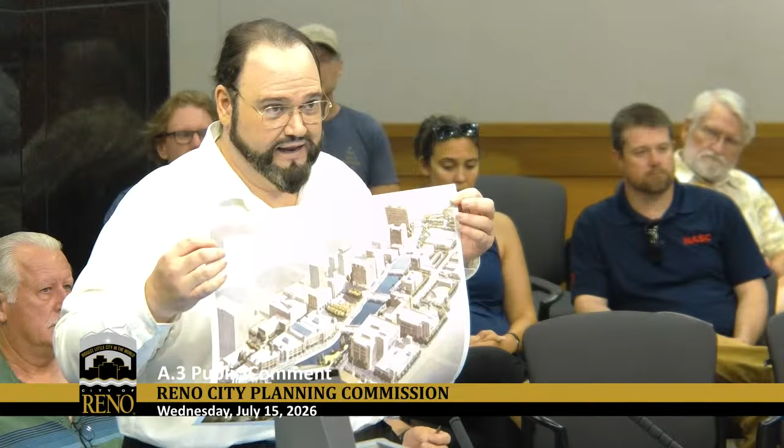Also, I found out additional information, I just want to share this. This is from 1995. This came from a redevelopment agency report about the riverfront revitalization plan that came about after a series of public workshops with the city. Basically, this shows the conceived, finished Riverwalk, which continues all the way to 2nd Street, at the point that wanted to use the Virginia and Truckee Railroad Bridge as a footbridge to open up that east side. So that area that has yet to be developed is very important.

And it's an unfinished project. We have an unfinished Riverwalk that the city is still uncovering archaeological data from, since the redevelopment agency went dormant around 2011 and 2012. So there are other additional code violations happening in that area. The biggest one is the Auto Museum.

Thank you, Damien. Thank you. There's more, I'll talk to anyone else later. Thank you so much.

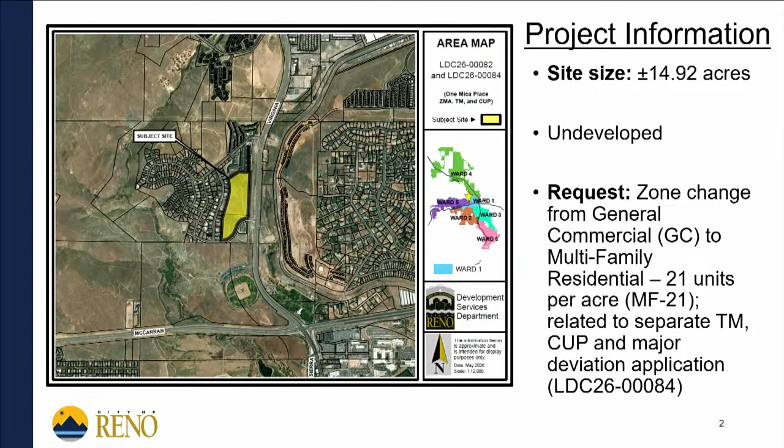This is related to a separate tentative subdivision map, conditional use permit, and major deviation application, LDC 26-84, which you will be hearing next. Zooming in, we can see that the surrounding land uses include multifamily to the north, south, and west, and public right-of-way and undeveloped land to the east.

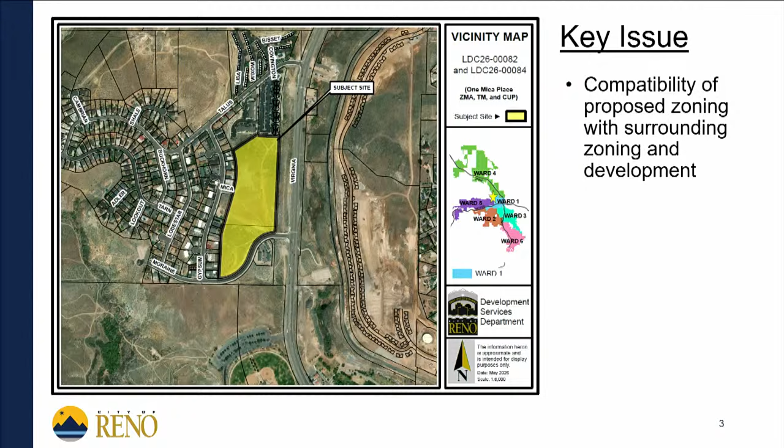The key issue that staff analyzed is compatibility of the proposed zoning with the surrounding zoning and development. The current zoning is again general commercial. This zoning does conform with the underlying master plan designation. However, a corresponding request has been made for development of the property with 74 detached and attached single-family homes. The existing GC zone does not allow for the proposed detached single-family homes, while the proposed MF21 zone allows for both single-family detached and attached product types.

Subsequent residential development will provide for compatible density just outside of the McCarran Boulevard Ring Road and opportunities for transit commutes. The proposed zone change will provide a directly compatible land use and greater flexibility in developing the site, as residential units typically offer greater adaptability to sloped land than does commercial development.

The adjoining MF30 zone neighborhood to the west is predominantly comprised of smaller multifamily properties containing 4 to 8 units per lot. The adjacent MF30 and MF21 zoned parcels to the north and south are developed with larger multifamily uses. Given the surrounding uses and multifamily zoning, the proposed zone change to MF21 is considered to be consistent and compatible with the surrounding zoning and development pattern.

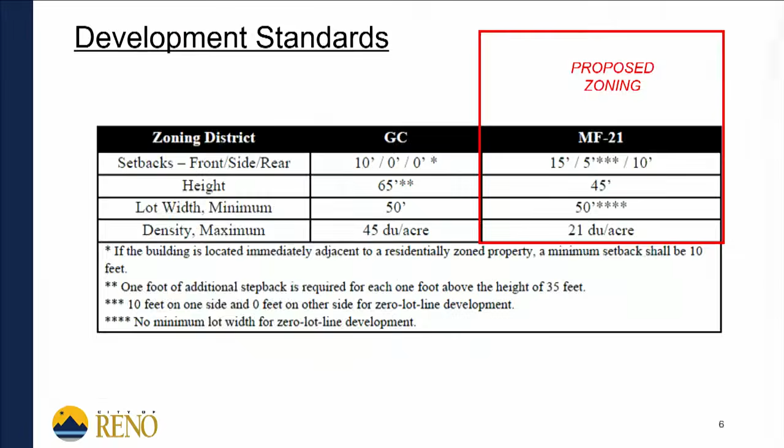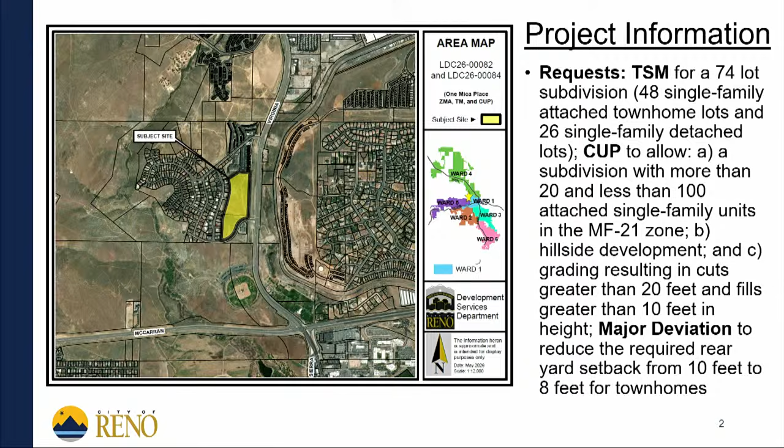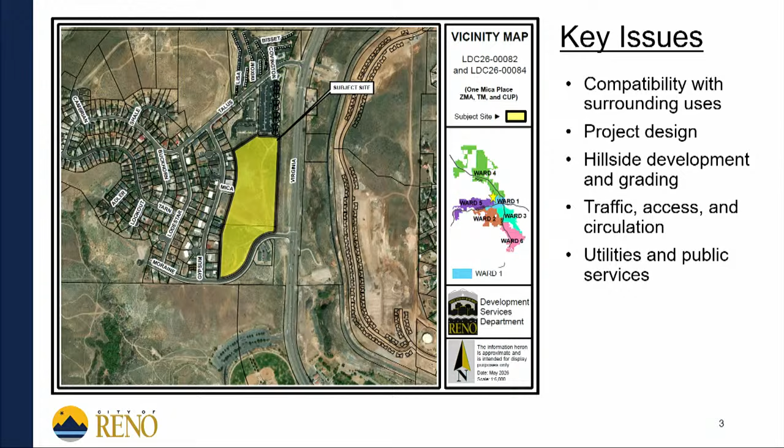Again, zooming in, you have the 4-story apartments and condominiums to the north. You have 2-story apartments to the west, 2-story apartments to the south across Moraine Way, and the undeveloped property to the east across North Virginia. The key issues that staff analyzed are compatibility with surrounding uses, project design, hillside development and grading, traffic access and circulation, and utilities and public services.

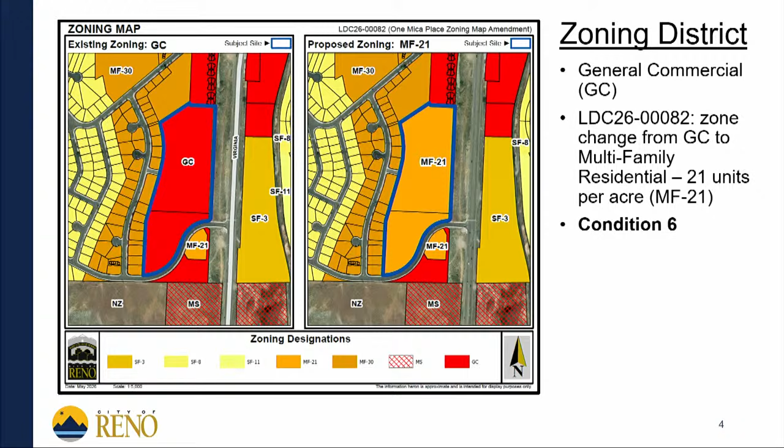Again, the existing zoning is general commercial. You just heard and recommended approval on LDC 26-82 to change the zoning from GC to MF21. Recognize that this application adheres to the MF21 zoning standards and is contingent upon the adoption of the zoning map amendment. Should the council decide not to adopt the zoning map amendment to MF21, the application will no longer be valid as the project does not meet the current GC standards. And staff is including that as condition number 6.

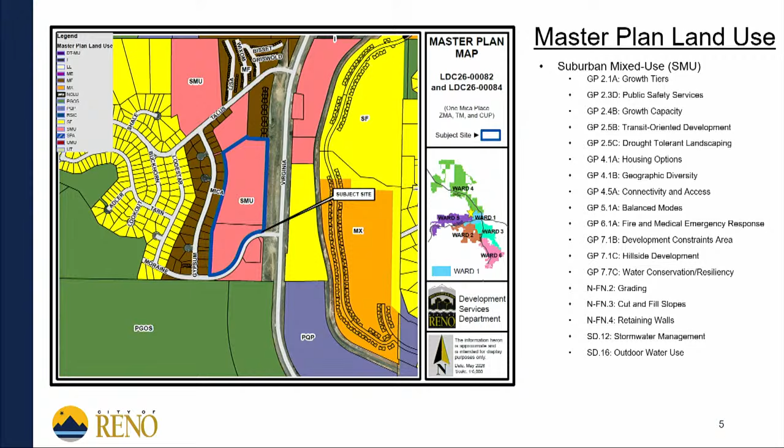The master plan land use is suburban mixed use, and on the screen are 18 goals and policies from the master plan that are in support of the proposed request.

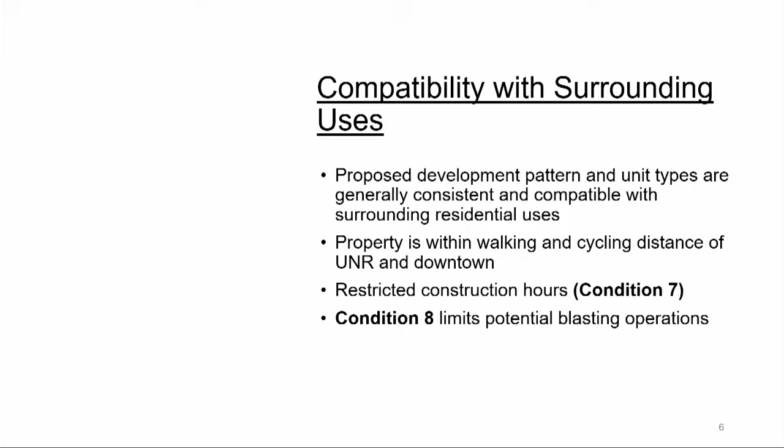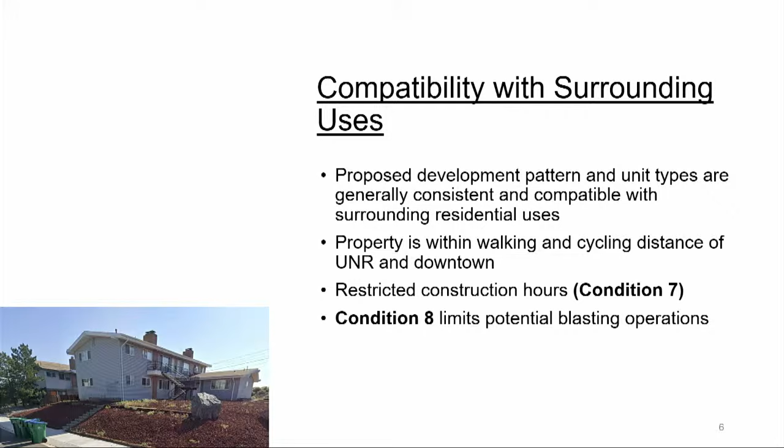Turning to compatibility with surrounding land uses, the adjoining MF30 zone neighborhood to the west is predominantly comprised of smaller multifamily properties containing 4 to 8 units per lot, an example of which is shown in the lower left-hand corner. The adjacent MF30 and MF21 zone parcels to the north and south are developed with larger multifamily uses such as those shown here. The proposed development pattern and unit types are generally consistent and compatible with these surrounding residential uses.

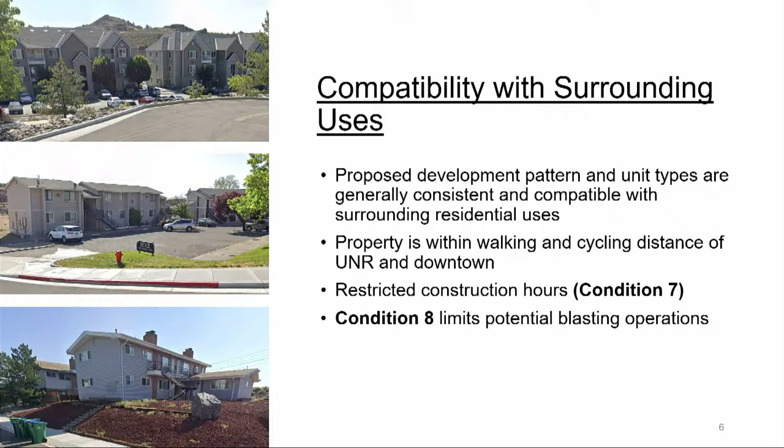Also note that the property is within walking and cycling distance of UNR and downtown. Staff is including recommended condition number 7, restricting construction hours. And in reference to the solid granite that this property is comprised of, staff is also recommending condition number 8 that limits potential blasting operations. Given all of the above, the proposed use is generally compatible with the existing land uses in the area.

These homes propose hillside adaptive architecture to appropriately work with the on-site grades.

Regarding parking, 148 parking spaces are required for these 74 units. The project includes 296 spaces within 2-car garages and 2-car driveways for each home, and an additional 61 common area and on-street parking spaces, for the equivalent of almost 5 spaces per residential lot.

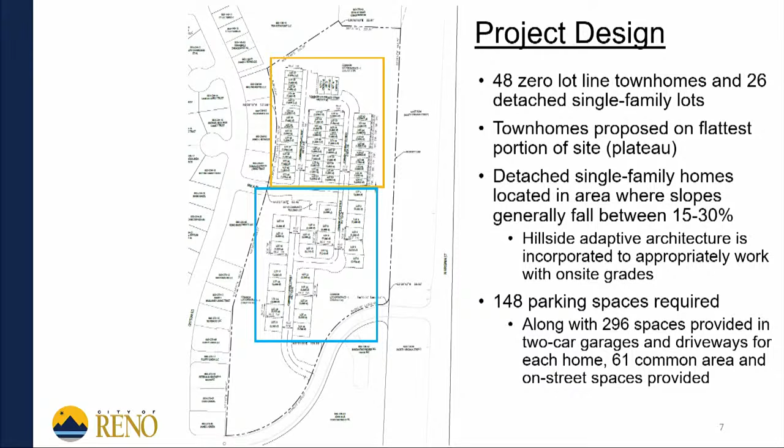This encroachment of the upstairs living area, which effectively increases the available living area without reducing the actual rear yard, is the subject of the major deviation. And lastly, you have the detached single-family homes that range from about 1,860 square feet up to about 2,640 square feet.

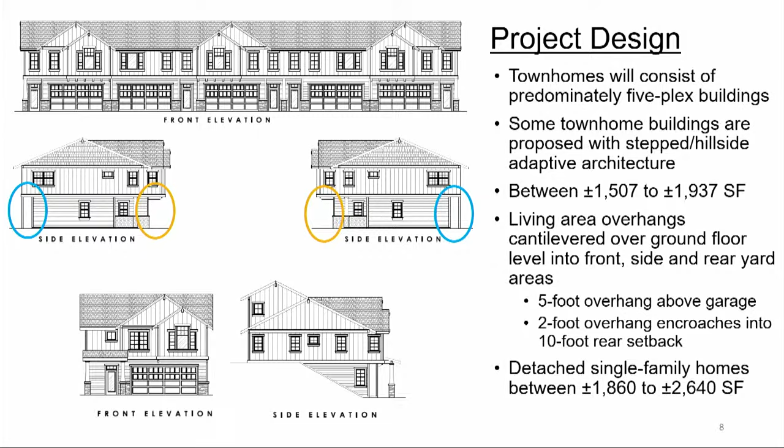Continuing with the project design, the project includes low maintenance and low water usage plantings that will be incorporated into the landscape treatment per condition number 9.

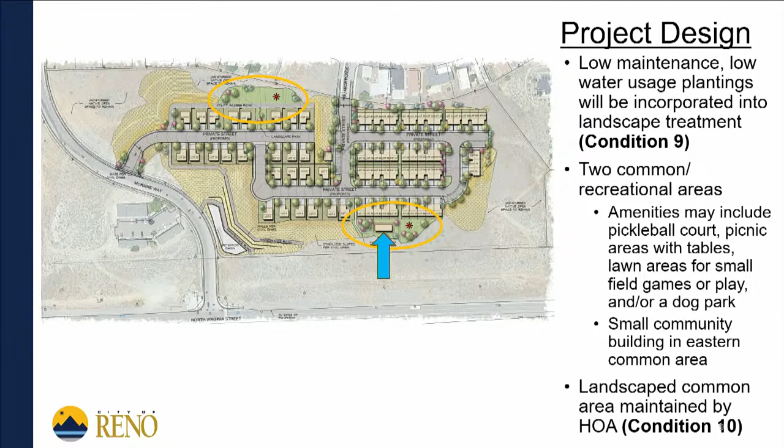There are 2 common and recreational areas shown on the screen here. Final amenities may include a pickleball court, picnic area with tables, lawn areas for small field games or play, and/or a dog park. There is also a small community building in the eastern common area shown here. All of the landscaped common areas will be maintained by the HOA per condition number 10.

Regarding hillside development and grading, the required open space calculation shows that about 8.26 acres of open space must be provided. RMC requires additional open space for development on natural slope areas greater than 30%, of which there are about 0.28 acres on steeper slopes proposed for development.

Therefore, an additional approximately 0.56 acres of open space is required, bringing the total open space area requirement to about 8.82 acres. The proposed site plan shows about 8.7 acres of open space, and therefore staff is including condition number 13 to reconcile that. Also, the max depth of cuts is about 34 feet, and the max depth of fills is about 51 feet.

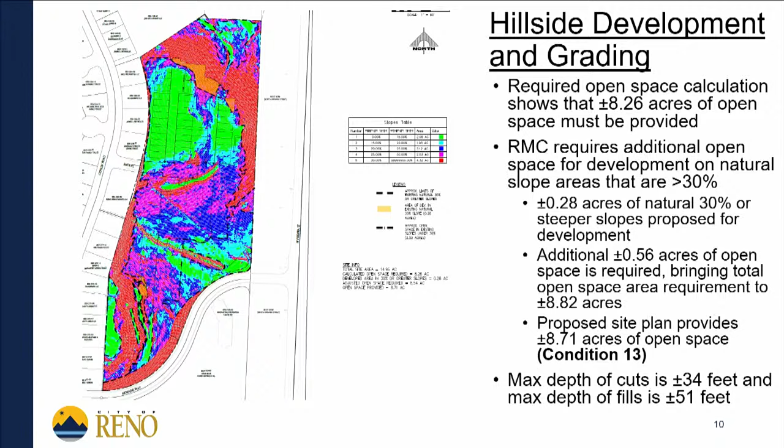Turning to traffic access and circulation, RMC requires a traffic entry and access study if a proposed development is anticipated to generate more than 100 peak hour trips, or a full traffic impact analysis if the project would generate more than 200 peak hour trips.

The project's trip generation analysis identified that 551 average daily trips would be generated, including 41 AM peak hour and 48 PM peak hour trips, and this level of traffic does not trigger any traffic mitigation.

Access will be provided from Moraine Way and Mica Place, and staff has determined that site circulation, emergency access, and pedestrian access are adequate. The nearest transit facilities are located adjacent to the site near the intersection of Moraine Way and North Virginia Street, and staff is recommending condition number 20 to require the RTC Smart Trips program information be distributed to all of the homeowners.

Lastly, regarding utilities and public services, no sewer capacity issues were identified. The nearest fire station is Station 10, about 1 mile from the site, and that should be within the 6-minute response time. Police patrols should not be significantly impacted by this project.

And the project is slated to be served by Elmcrest Elementary, Clayton Middle School, and McQueen High School. The school district has indicated they do not anticipate any issues accommodating students generated by the project.

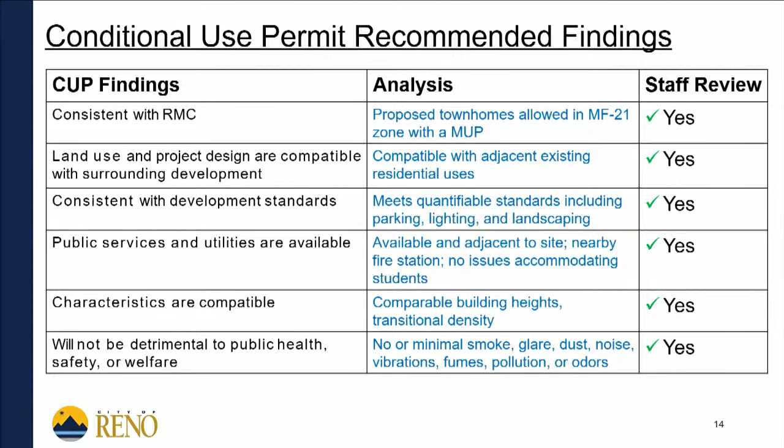I also included the major site plan review recommended findings related to the grading and the hillside development, even though you are not considering a major site plan review tonight because it has been wrapped into the CUP. Nevertheless, it does have some different findings, and again, staff can make these recommended findings.

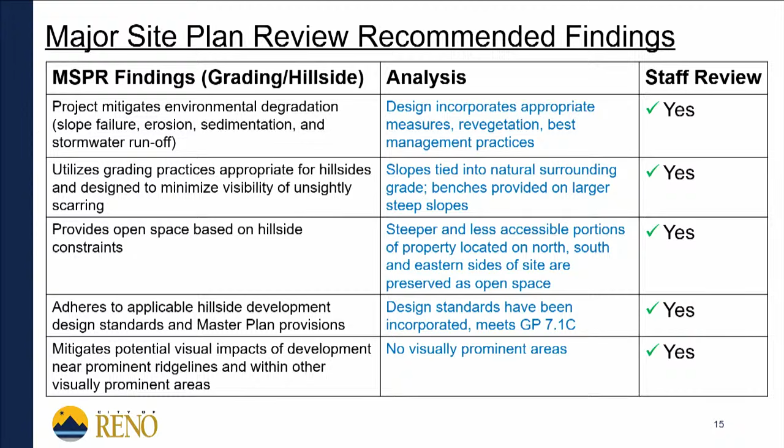And last but not least, the major deviation recommended findings, and again, staff can make these recommended findings. Here's a recommended motion. I'm available for questions, and I believe Mr. Snellgrove is going to be making a presentation.

Snellgrove is going to be making a presentation. Great, thank you, Mr. Foster.

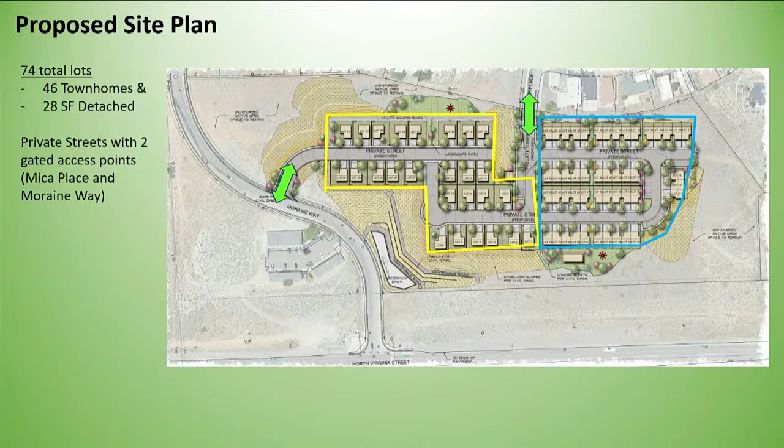We have parking on both sides of the street within the single-family detached area. Within the single-family attached area, we don't have street parking because of the line of driveways, so there's not much room there, but we've established 36 common area parking pockets, and each home will have a 2-car garage and a 2-car driveway.

Jeff pointed out the location of our amenity areas, and I had to chuckle because he did it in about the same manner. Let's see, we went through parking—yeah, I think I covered all that.

This is the slope analysis map. The brighter green areas show 0 to 15% slopes. You can see where we have the townhomes on the northern part of the site, on the right-hand side of the map, which is more conducive to bigger buildings. This is one of the challenges for this site—in general commercial you tend to have bigger buildings, but this site isn't necessarily conducive to that.

This area coming in off of Mica is actually a plateaued area that's been graded. We do have stepped architecture, which I'll cover in another slide, with some buildings going uphill, some downhill, and some flat to minimize overall grading on the site.

When you get to the south end towards Moraine Way, it tends to be in the 15 to 30% slopes. By regional planning and City of Reno standards, that's considered developable, but it takes more care working in those areas. The nice thing about single-family detached is they have smaller footprints, so we can step them down the hill more easily than with a townhome product.

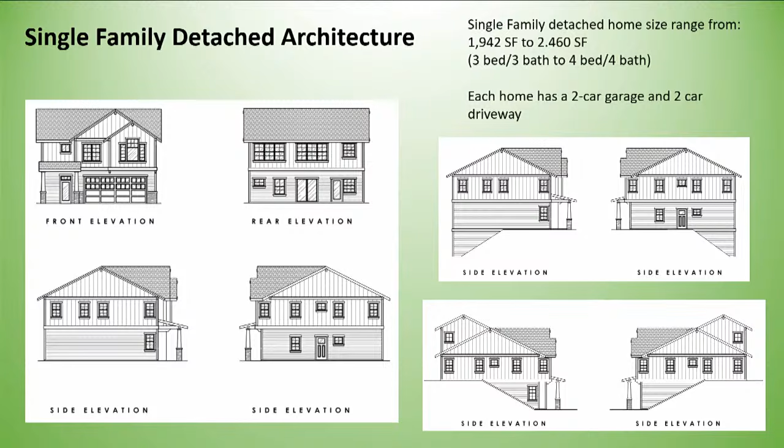On the single family, we've got the same considerations. We have some homes that will be flat, the standard 2-story, and then we've also got uphill and downhill stepped single family. None of these have the pop outs or protrusions in the rear yard, and none of the single family detached have the major deviation component to them.

This went through a few approvals over time. The one I was able to get the most information on was the most recent one, from 2015. I took a look at what some of the concerns were. This was appealed, it was called Southern Edge, and it went on to City Council. I took a look at the appeal information and we tried to appropriately address these things within our development. Were we able to address everything? No, probably not, but I think we've done a very good job.

Water pressure - we did reach out to TMWA to ask about any water pressure issues in the neighborhood, and I believe that possibly Mr. Tabor, who spoke during the last item under the zone change, might have been either a family member or the person that filed the appeal. So hopefully the water pressure has gotten better up there over time, but I know that was a concern. We'll talk to TMWA.

We will have to meet requirements for TMWA meeting the pressure for this subdivision, not only for domestic use but also for fire flow pressures in the neighborhood. When we talked to Tim Simpson, Mr. Sutherland, the engineer on the project, talked to him and he said he was unaware of any pressure issues in the area. So we will be looking into that because we definitely want to be able to meet it with our subdivision.

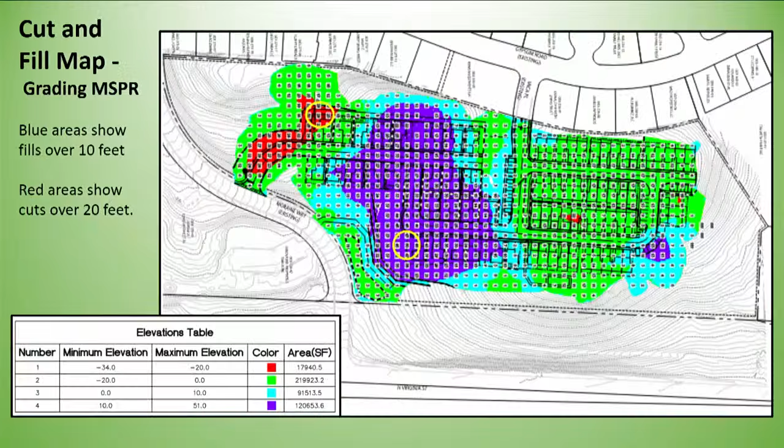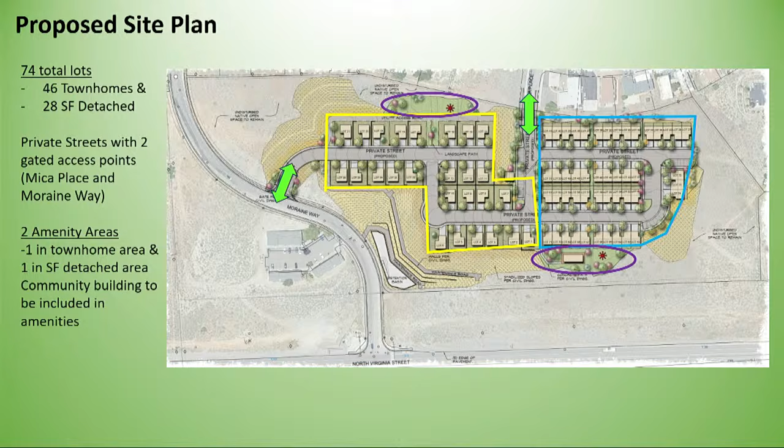Impacts on adjacent properties on West Gypsum - we're separated from the single-family homes by probably plus or minus 100 or more feet, and where we get closest to some of the homes on Gypsum is really on the townhome portion, where we've got a 10-foot rear yard and another probably 10 to 15 feet toward the northern side of the map. It gets a little closer there, but we feel we've got good separation. We're not grading right up adjacent to those existing lots or uses, so we feel we've appropriately addressed that.

Safe for pedestrians and bicycles - through the research on this, we've come to learn NDOT has a project that'll go on after the 395 freeway improvements are done, which are currently blocking off the access on and off the freeway from 395.

And when those get done, they're estimating it's probably 2028, which likely won't be too far off from when this gets built. And if you know the time frames necessary to go through final engineering and get the approvals in place, we'll probably be in a similar time frame. But I understand there's a multimodal transit lane NDOT's working on that'll go all the way up to the Panther Valley connection between McCarran and Panther Valley. This is an area that needs pedestrian access, and that is in the plans and NDOT has that worked out.

Street parking on Gypsum, we talked about that earlier, will be gated. We've got ample parking. We don't foresee that people really need to park outside of the subdivision, thus increasing impact on that.

Inclement weather and icy roads, I understand that one. I've seen it on different slopes. I think Moraine was about 8%, and Talbot might have been in the 6 or 7% slope range. Our roads within the subdivision are generally south-facing. You get a couple shady parts on Moraine and Talbot that can hold ice a little longer, but that really becomes more of a city road maintenance issue. Our streets within the subdivision won't be the responsibility of the city of Reno — they'll be private streets because they're gated.

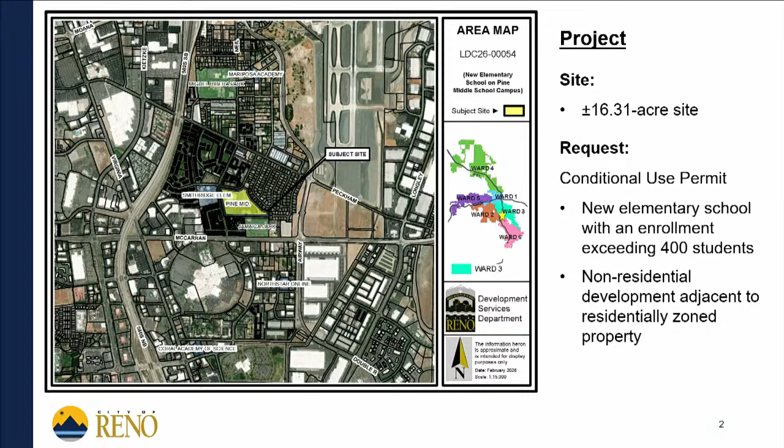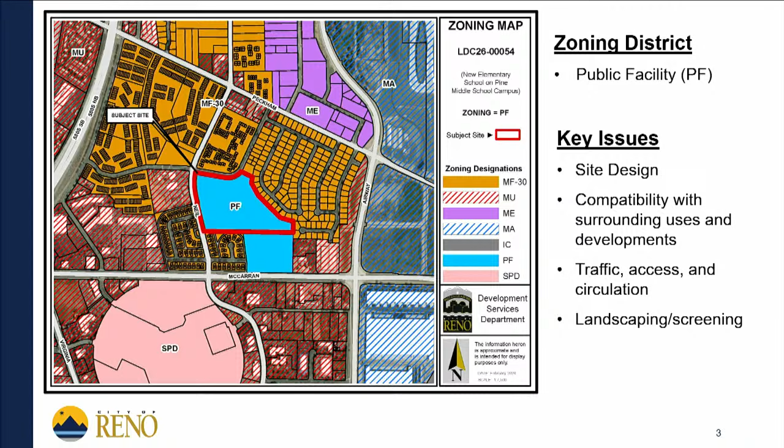Here in yellow you can see the existing Pine Middle School campus. It's on the southeastern corner of the intersection of Neal and Filbert. It's a 16-acre site, and the request before you today is for a new elementary school with an enrollment exceeding 400 students and non-residential development adjacent to a residentially zoned property. The subject site is currently in the Public Facilities Zoning District, which is completely appropriate for a school. Key issues we looked at were site design, compatibility with surrounding uses and developments, mostly traffic access and circulation, and landscaping and screening.

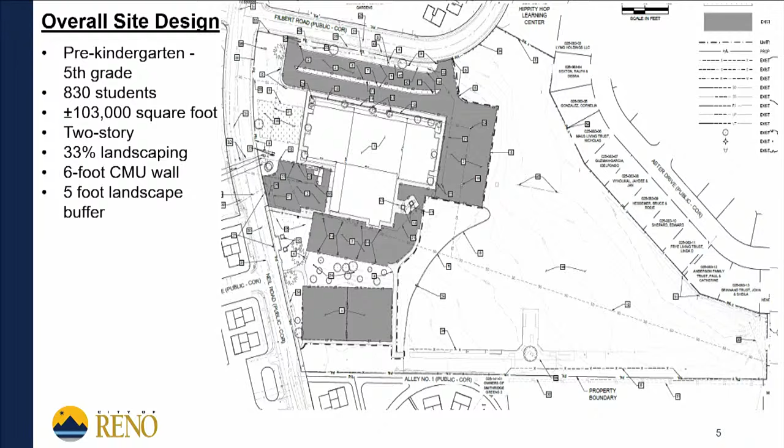The only part of this project that's really going to be more impactful to those adjacent residential uses is this area right here, which is going to be a secondary pickup and drop off for parents. Because it's the secondary drop off, just this loop over here, we did ask that the applicant provide a 6-foot CMU wall and 5 feet of landscaping along there to mitigate any impact, because as you can see on that demolition plan, nothing has existed in that location for the last 50 years.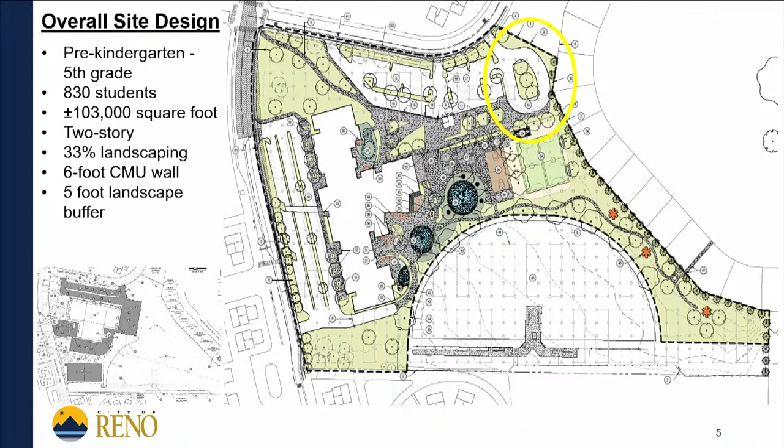So again, we're looking at pre-kindergarten through 5th grade, approximately 830 students, which is around the same number that go to the two schools right now. This would be just over 100,000 square feet, a 2-story building. Most of that landscaping in the fields that are out there are going to be maintained, so it is a large percent of landscaping.

Traffic access and circulation was probably our top issue on this that we analyzed over and over. I will point out that long before the project came into planning's hands, the applicant, Washoe County School District, was working with our public works and engineering departments to figure out how best to mitigate traffic in this location. What they came up with was that parent pickup and drop off is what's kind of in that purple-pink color, so it's going to be moved from the Filbert side over to the Neil Road side.

But there will still be that secondary pickup and drop off over on the north side, and the school bus will drop off and pick up over there on that north side off of Filbert, delineating those two areas to reduce traffic impact. They are going to put a mid-block crosswalk on Neil to prevent left-hand traffic, a raised center median to prevent that left-hand traffic, and 2 raised mid-block crosswalks with flashing beacons as well.

If you have more questions about traffic, I think we can bring somebody else up here to talk about it.

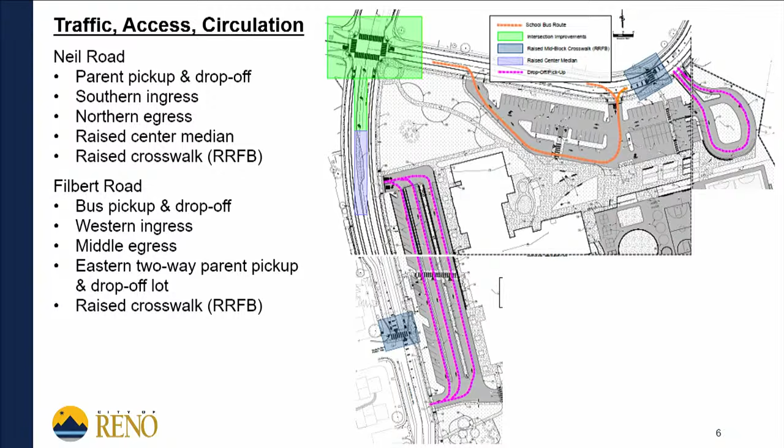This project did go through the Ward 3 Neighborhood Advisory Board. Overall, the NAB members appreciated the investment in the new elementary school. They wanted to make sure adequate shade was provided on campus. They had safety concerns related to the nearby intersection and wanted to know if this would possibly require a traffic signal at that location, which it didn't. They were very interested in the potential traffic control improvements, which I just showed you on the screen there.

We did only receive 1 public comment, and they were concerned about relocating the primary pickup and drop off from the Filbert side to the Neil Road side. The applicant did reach out to them and explained the basis for that change, and I didn't hear anything else from them.

Conditional use permit findings, this is a pretty easy one. It's located in the Public Facilities Zoning District. It's an existing use in an existing neighborhood. Schools are generally compatible with neighborhoods as they serve those neighborhood families. This will have similar activity patterns to the schools that are already there, and a new school is always considered a community amenity.

With that, that concludes my presentation. The recommended motion is on the board, and the applicant is here with a presentation as well. Thank you, Ms. Picotti.

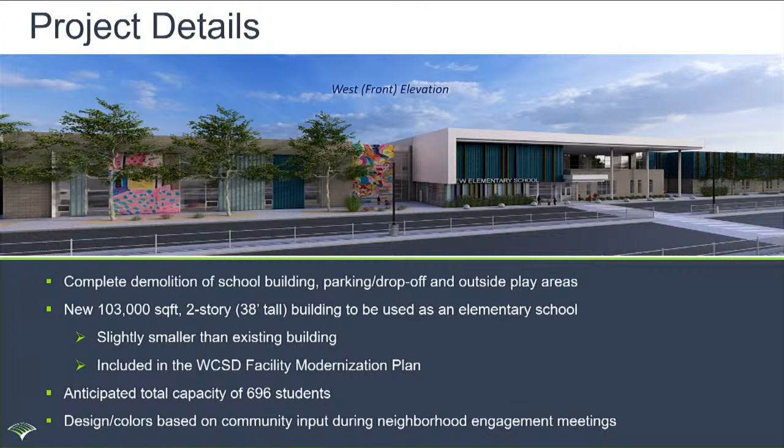Talking a little about the site details - Leah talked about the existing school building. It is being demolished, and the orientation of that building is going to turn. Right now the main entrance is off of Filbert, and with this demolition and rebuild, the main entrance will be off of Neil Road, where the primary parent drop-off area is shown in light blue along Neil. That orientation shifted in order to separate bus loading and unloading areas from parent drop-off to provide safety for students coming and going. Orienting it towards Neil and separating it from bus loading provides student protection and keeps vehicles from engaging in an unsafe manner.

The project does include new playground area, as Leah mentioned, and a lot of that's driven by community input during those meetings. There is no change proposed to the softball fields in the southeast corner of the project - the school district wants to maintain those and keep them open as they are today.

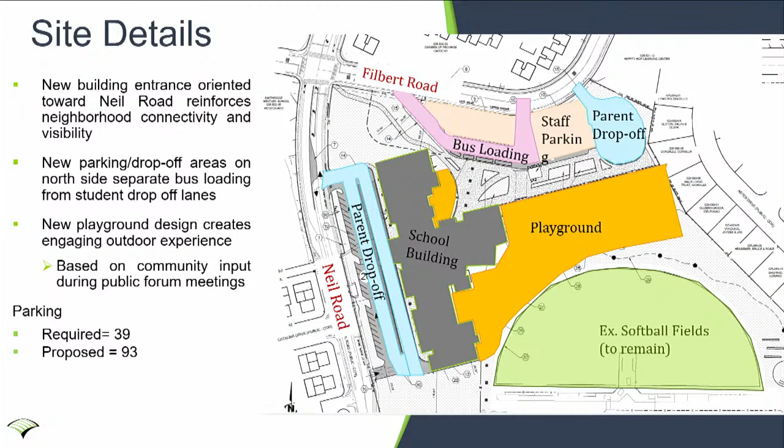You mentioned parking on some of the other projects. Parking required for this school is 39 spaces, and we are proposing 93 spaces that would accommodate parents and all the employees at the school district. So we've well exceeded that requirement.

Landscaping and screening - again, Leah did a great job talking about this, just a couple things to mention. The proposed project well exceeds the requirement. We have almost 34% of the site in landscaping, 200 trees minimum, and we've done our best to preserve and maintain some of the trees. Right now we're looking at 13 of the trees - I apologize, I don't know how many trees exist there today.

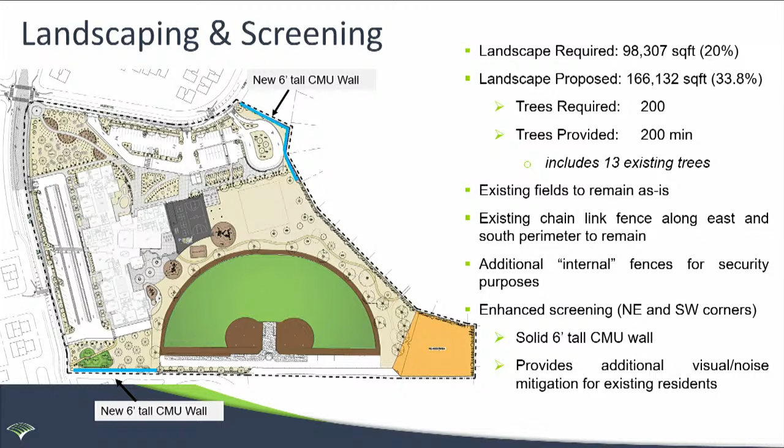I mentioned the existing fields - the chain link fences along the east and south boundary will remain, as well as some smaller internal fences for student safety purposes. We also mentioned the enhanced screening in the northeast corner, shown by the blue line there, and there's also a new 6-foot-tall CMU wall down in the southwest corner. Those are placed intentionally adjacent to existing residential areas - we're trying to mitigate and screen for noise or potential headlights that might impact those areas by providing those 6-foot-tall CMU walls.

Traffic and circulation - Leah touched on this as well. We did a traffic impact study, considering the existing school capacity as well as the proposed new school capacity. The study area included 9 intersections and 3 vehicular access points, color-coded to make it easy: Neil Road in green, where we looked at those 2 entrances into the primary parent pickup area; orange is the school bus route for drop-off and pickup; and dark blue or purple is the new parent pickup area. The project is anticipated to generate approximately 1,500 ADT, pretty similar to what's there today.

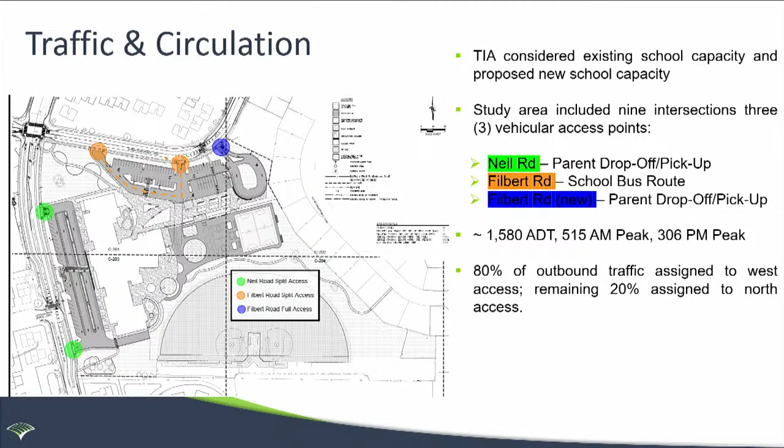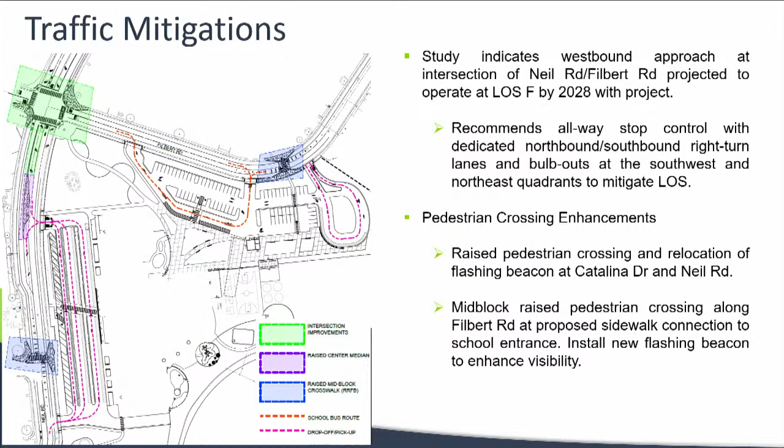We're not expecting a big difference in traffic with the new project. Leah touched on the mitigations that came out of the traffic study, but I'll touch on them again. The big improvement was an all-way stop control at the Filbert and Neil intersection, which you can see on the exhibit, along with some pedestrian crossing improvements on Neil Road and again at Filbert. If you have specific questions about the traffic study or the mitigations, Garth Oxel is here from JUB, who prepared the study, and he can answer your questions.

I kind of breezed through that in a hurry, but I think Leah did a great job. I'm happy to answer any questions, and the school district is here if you have more specific questions about the project. Thank you.

That moves us into disclosures. Mr. McCoy? Commissioner McCoy, no disclosures. Commissioner Williams: read and reviewed the material and familiar with the site. Commissioner Confiantini: read and reviewed materials, brief text exchange with representation at Wood Rogers. Commissioner Valto, no disclosure. All right, that moves us on to public comment.

Thank you, Chair. I have one public comment in person from Nicholas Moss. Come on up.

Hello, Council. I'm Nicholas Moss, 4641 Astor Drive. If you pull up the site plan, I'm right by the basketball court, I think. A couple concerns: right now Pine Middle School has very bright lights, so we've put blackout curtains on our bedroom. Nighttime lighting is a concern for the neighbors, especially those right along that fence. I'm wondering if we could specify some sort of downward-pointing, possibly LED lights that don't shine directly into the backyard.

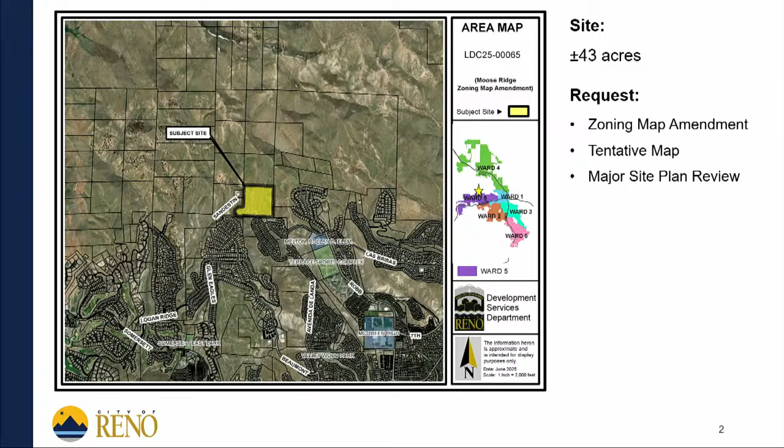So request number one is for that zoning map amendment. What you see on the board is what was presented a year ago, from SF3 to SF8. Planning Commission at that time said they'd like to understand more about what can be developed on this property and what the real actual densities are related to hillside development and everything else.

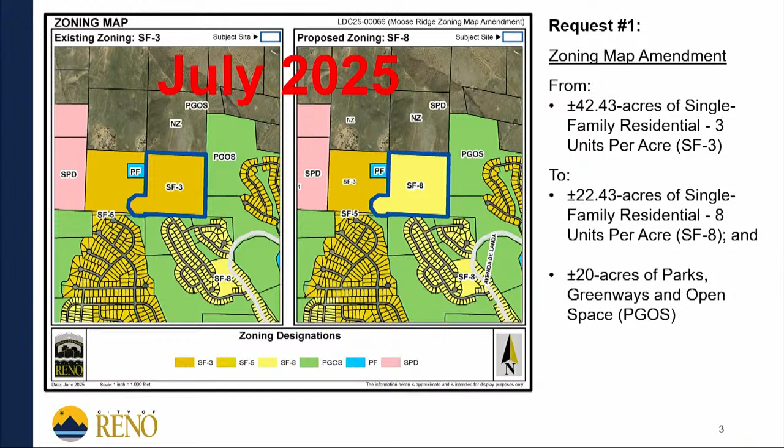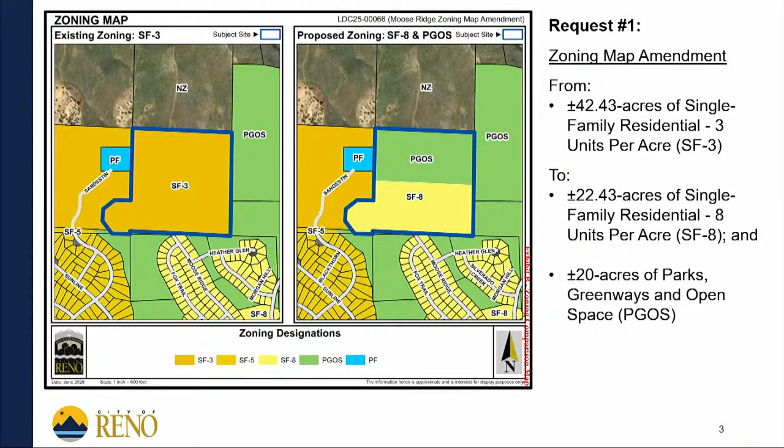So now the applicant has come forward with that tentative map and the major site plan review, with 20 acres of parks, greenways, and open space on the northern portion of that parcel. So now they're looking at 42.43 acres of single-family residential at 3 units per acre, changed to 22.43 acres of single-family residential at 8 units per acre, and 20 acres of parks, greenways, and open space.

So request number 2 is for the tentative map. This is for a 46-unit single-family detached subdivision. That is not what's in the staff report — the staff report shows 47 units, but there was a last-minute change to the design, reducing it to 46 units. So what's before you is actually 46 units, not 47.

So we have that tentative map request, and then a major site plan review for everything applicable. We have grading resulting in cuts greater than 20 feet in depth and fills greater than 10 feet in height. Grading within the parks, greenways, and open space — there's just a small sliver of that down at the very bottom. It's a separate parcel, not included in the zoning map change, but it is included in the tentative map because it's going to be graded for the roadway. And then we have hillside development and disturbance of a major drainage way.

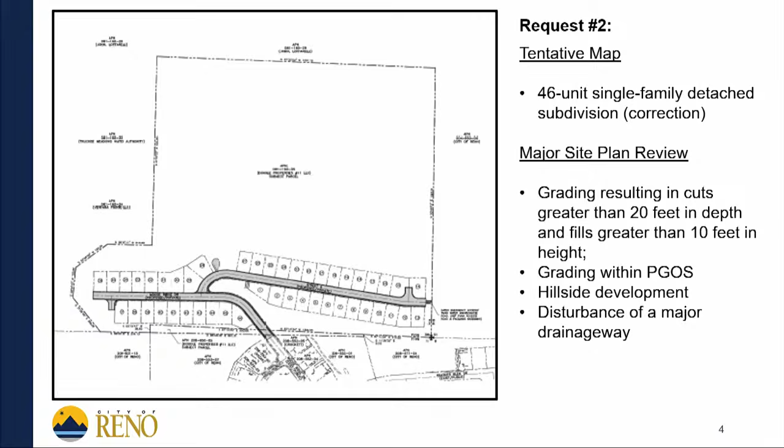So I have the slope map up here because when we went to Planning Commission last time, they had a lot of questions about development. How can this property be developed? How can we look at a zoning map amendment without understanding what can really be here? At the time, the applicant and staff concurred that because of the slopes on this property, any kind of development was going to be pretty restricted.

They didn't like the idea of rezoning the whole 42 acres without understanding what was really possible, and then drainage on that site. So staff took a look at it this time, and we looked at the overall site design and the lot layout, the compatibility with surrounding residential development, and basically what the surrounding densities look like in comparison to what this would look like.

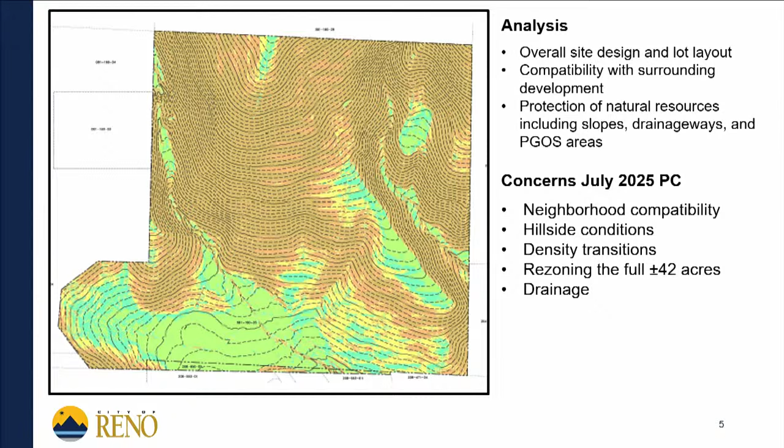Protection of those natural resources, including the slopes, the drainage ways, and that PGOS area. So what we've come up with here is about 9 acres of developable area. And if we go back to that slope map there, you can see pretty much this is the area down

on green, which is the least steep part of this property. So here you can see that tentative map there. We have approximately 33 acres of open space, which is fabulous. This will accommodate 46 single-family detached homes with average lot sizes of about 6,000 to about 7,300, which is very consistent with SF8 development and those surrounding subdivisions.

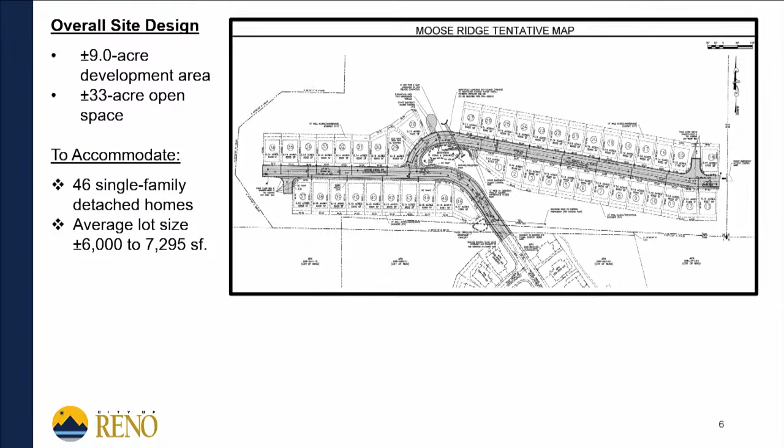Previous applicants and previous planners worked really hard to make sure that this was going to be a project that was going to protect the neighborhood, improve drainage, maintain those existing trails. There's some 4x4 trails up there. They wanted to make sure that those would be preserved and that people could still access this private property.

And basically, those conditions of approval have been vetted. They have been approved by planning commissions. They have been reviewed by applicants. They have been presented to the neighbors. So when I looked at the conditions of approval for this property, for this project, I said, well, all of this resolves or mitigates those concerns.

So basically, condition 6 through condition 19 are the same conditions that were placed on the previous approvals. Just to highlight a few of those things, we have concerns related to density and compatibility, but we have rockery walls and riprap and natural landscaping. Things are going to be backfilled with soil. We're going to have revegetation.

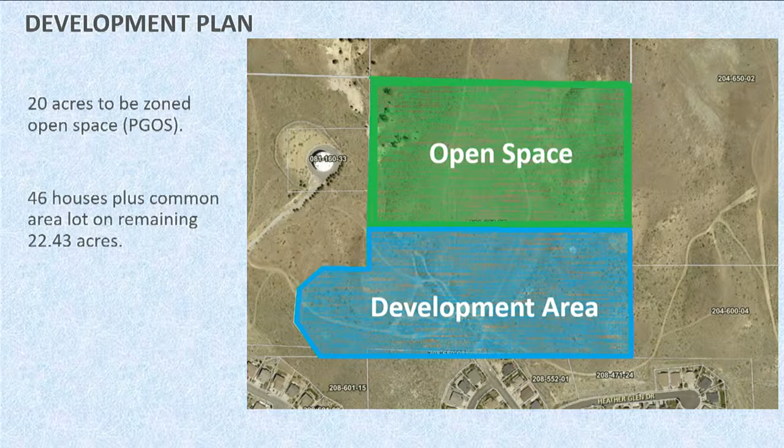So this is the schematic of our development plan. 20 acres to be zoned open space, and then the blue part is the development area. That's where our subdivision will go.

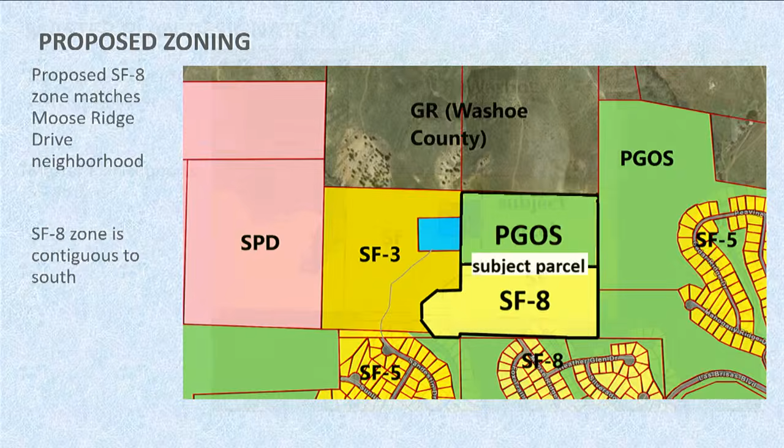The important elements here are we're going to have streets with public parking, so access to existing trails will be maintained. People can drive up and park and use that open space above us, same way they are now. We have ample parking on the street, and then each unit has driveway and garage parking.

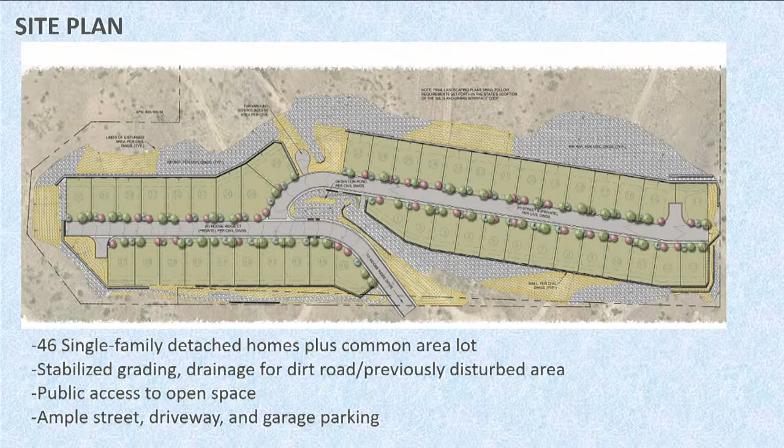Additionally, there has been concern from the neighborhood about flooding or what I would call informal grading, uncontrolled erosion in the area. That's just I think from off-road use, from trail use. I'm not sure how that developed, but it obviously wasn't planned, it wasn't regulated, it was just people going at it. So we're going to stabilize that. We have no choice but to, if there's an existing problem, we'll fix that. So we're going to stabilize that area and reinforce it, provide engineered drainage, formalize the engineering that needs to be done.

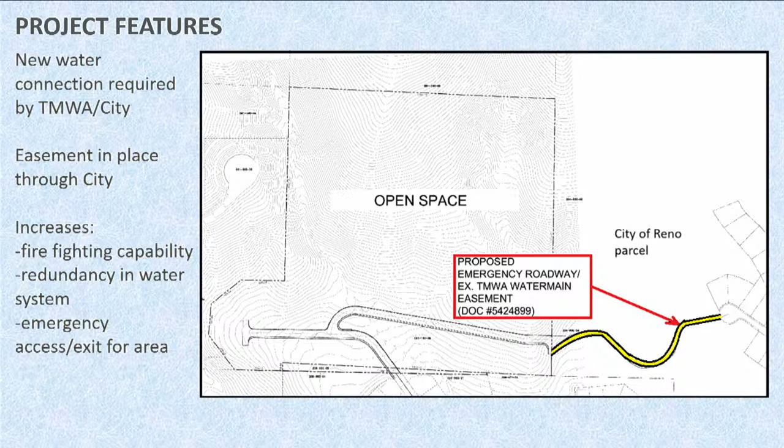Additionally, we're also working with the city of Reno and TMWA on this project. We have agreements in place with the city of Reno and with TMWA to provide road access to the neighborhood to the east of us, and allow them to install a water line in there. So we're adding redundancy to the water system. That's a public benefit. It allows improved firefighting, it allows more stability of the water supply. So we're to some degree partnering with public entities on this project for the benefit of the greater area.

So the major site plan review, I would just like to point out that's a fairly common element of any project in hilly areas of Reno. The cuts and fills, hillside development, disturbance of a major drainage way, those are certainly standard items for anything out in this side of town. So that's not really unique to this project. That's part of the planning process, and we're complying with those requirements.

As I stated earlier, the goal is to allow our design to minimize grading on the steeper parts of the slopes or the more visible parts. So our project is both on the more accessible slopes and on the less visible ones. So we won't be extending our development far up on the hillside or up on ridge lines.

So an overall summary: we promote the goals of the master plan. We're adding housing, we're adjacent to existing residential. Our zoning that we're requesting is compatible with the area. The tentative map does not maximize the unit count, we're well below the maximum potential there. Major infrastructure for the project is in place.

Roads in the area are generously sized, they can easily handle this traffic. There's been questions from the neighborhood about traffic, but the traffic numbers just don't show that. We don't trigger any traffic problems, and the project is too small to trigger a major traffic study. I noted last time we were here that the roads serving that neighborhood are roughly the same pavement width as West Plumb Lane, which handles, I'm going to guess off the top of my head, 10 times the traffic. So roads, in my opinion, are fairly generous.

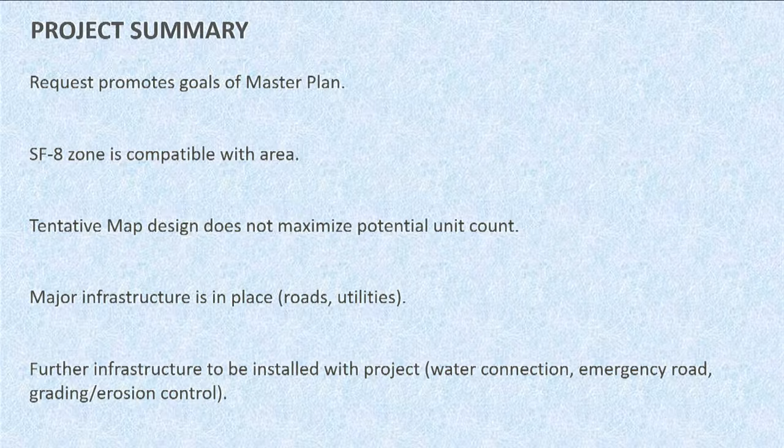Revisions and public outreach. We're here because we feel we've complied with Planning Commission's earlier request. We've provided a tentative map plan, and we've revised our zoning. So we hope that we have done our homework, done what was requested of us. We feel the project now meets the goals that were voiced to us last time we were here.

Earlier in the project, we did essentially a NAB meeting with Devon Reese. I walked the neighborhood and handed out printed descriptions of the project to both our immediate neighborhood and adjoining neighborhoods. I responded to calls and emails and did my best this week, but somehow nobody left contact information with the city, so I didn't talk to anybody recently. But I'm always happy to talk to neighbors and try to keep people informed.

The only final point, as with the earlier tentative map tonight, we do need all 4 votes. So if somebody had a major problem with this, we would much prefer to take a continuance and come back and have a larger hearing with the full group at a later date if it came to that. But again, we feel this project's been well reviewed and amended, and we feel it's approvable as it is.

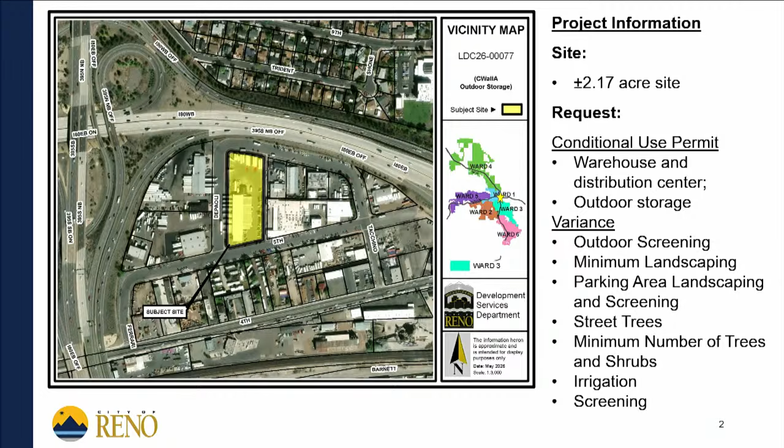So we're looking at a 2.17 acre site located just in the Spaghetti Bowl, the east side of the Spaghetti Bowl. You can see there you've got I-80 to the north and 395 to the west. So the request before you is a conditional use permit for warehouse and distribution center and outdoor storage. And then we've got a variance request for waivers for outdoor screening, landscaping, parking area landscaping, street trees, minimum number of trees and shrubs, irrigation, and screening.

So the site is located in the mixed-use urban zoning district. You have the freeway to the north, industrial uses to both the east and the west, and to the south, a small mobile home park that has existed in that area for over 50 years. Key issues that we looked at are general code compliance and compatibility with surrounding developments, specifically that compatibility with that mobile home park.

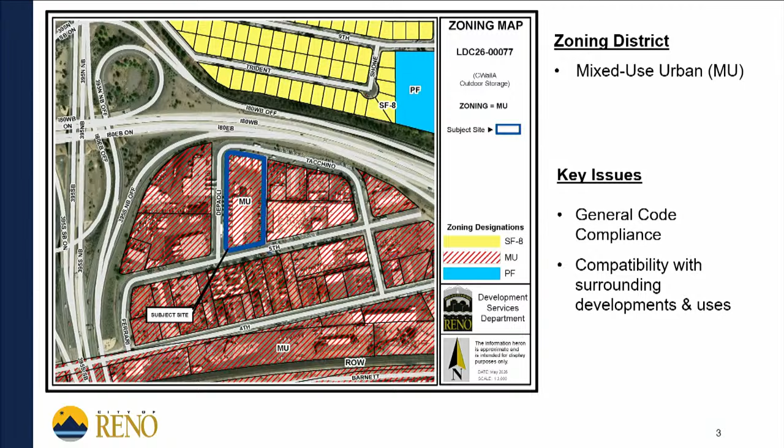So because the site was developed in 1958, we have longstanding nonconformities. It pretty much doesn't conform to anything in code right now. But specifically, there's loading in the right-of-way, there's truck maneuvering that wouldn't have been approved today, there's no sidewalks around the site, and there's no landscaping.

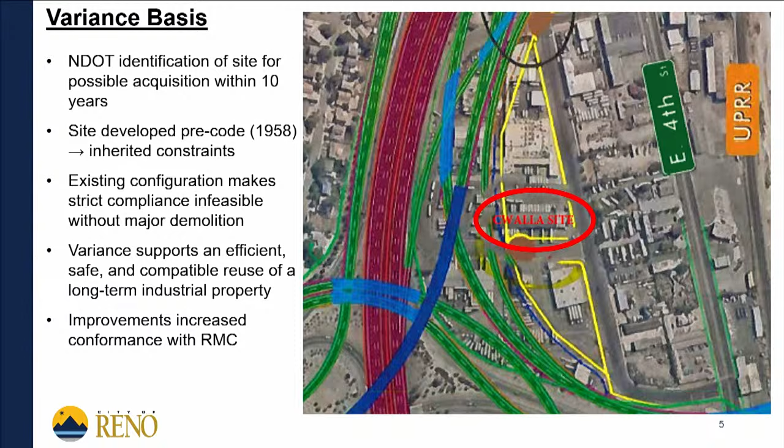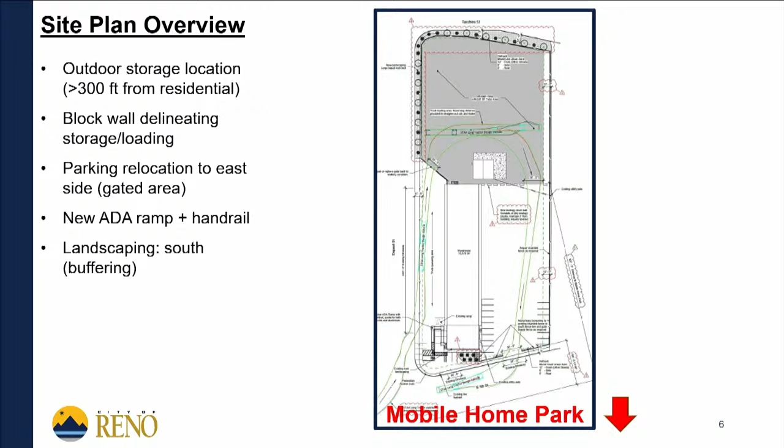That dark gray area highlighted is the proposed outdoor storage area. It is located over 300 feet from that mobile home park, and it's going to be delineated by an ecology block wall, those big blocks that fit together. We appreciate that because it delineates the outdoor storage area so it can't fill in toward the mobile home park. So we think that's a pretty good thing.

Now, if I zoom in on the southern portion of the site, there are a few other things that were non-conforming that we asked the applicants to mitigate. One was parking relocation. Originally all of the parking areas were down on the south portion of this property, and you might just pull forward and drive off the curb in this location.

So the applicant is proposing to relocate that existing parking area behind the gate onto the east side. They're moving the parking away from the mobile home park. They're installing a new ADA ramp and handrail, which you can see there, and they're going to do a little bit of landscape buffering right there in front.

The other thing that I don't have on here, but has happened in the last few days, is that we have asked them to do a sidewalk along this frontage. So it will improve pedestrian access through here because there actually are a lot of people who walk down this street.

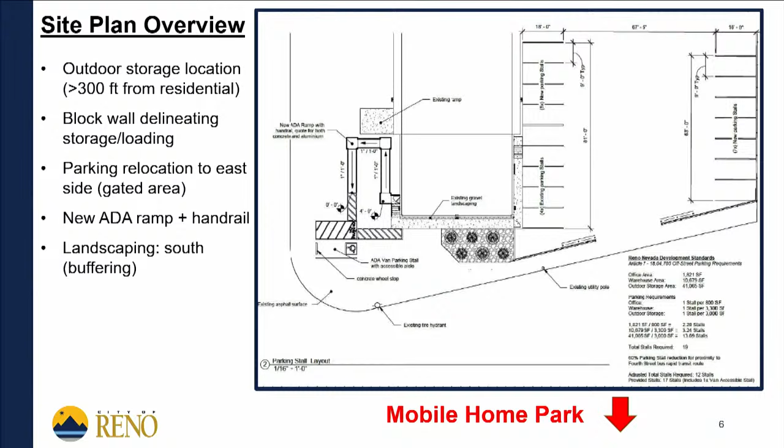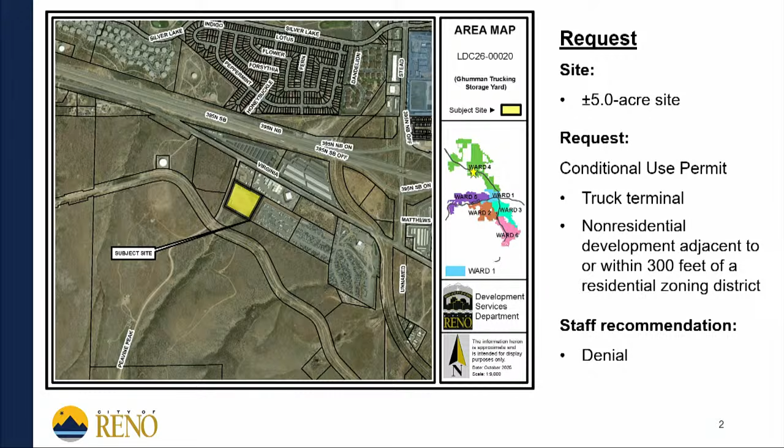Thank you, Commission. For the record, my name's Leah Picotti. For my final presentation of the night, I'm going to present this trucking storage yard. The site is just south of the intersection of Peavine Peak and North Virginia. It's a 5-acre site. The request before you today is for a conditional use permit for a truck terminal and non-residential development adjacent to or within 300 feet of a residential zoning district. Staff is recommending denial on this project.

So key issues that we looked at here is that we've had this application for 9 months, and the applicant is asserting that no improvements of any kind are being made or proposed, and they disagree that any improvements need to be made. Without plans, staff cannot verify compatibility, safety, access, or infrastructure compliance.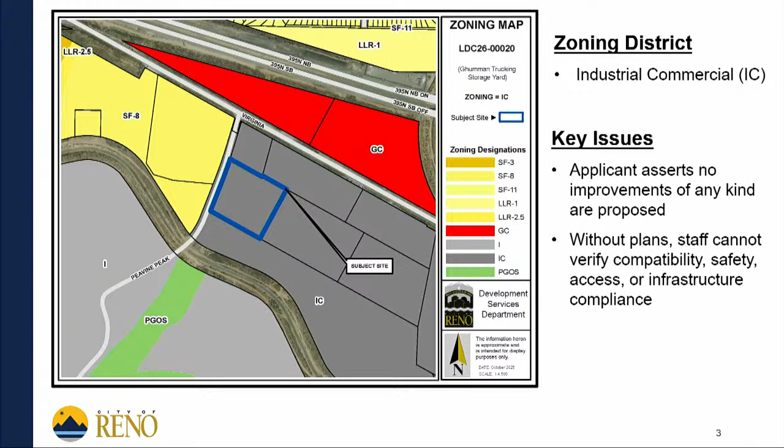So, a little bit of background here. This application was submitted in October of 2025. There was an existing code enforcement case for unpermitted truck storage, fencing, lighting, and grading. When this application came to me, I had been working with the applicant on another site for about a year before that through the business license process, and we had a similar situation going on there where it was being used as a truck terminal, but it wasn't permitted as such, and they didn't have the improvements that were required for it to be used as a truck terminal.

So we determined very early in the process that the truck terminal classification is the appropriate classification. It meets our definition, and basically what the applicant is doing is using this as a storage yard for trucks. People come here, drop their cars off, pick a truck, drive out and do their drive, then come back, get back in their car and leave. Truck terminal.

So over the past 9 months, staff has had 2 pretty long meetings with the applicant. As you probably know, in the state of Nevada, we have to process these applications within 65 days of receiving them. Per Reno Municipal Code, we have to have activity on that permit. If they request a waiver of the time frame, they then have 90 days. We need activity every 90 days to keep this going. We did not have activity on it.

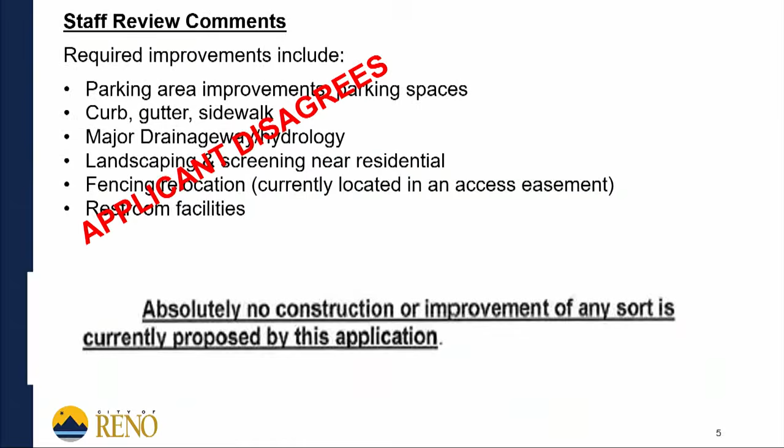All right, thanks, Ms. Picotti.